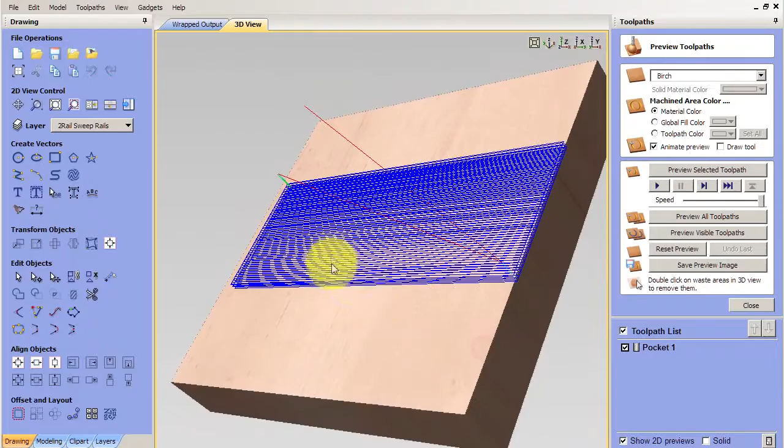For example, if we set up a little box here, and let's say we're going to make a normal pocket in this area. Let's say the pocket is 4 millimeters. Now we have an end mill, 4 millimeters. Let's put that in like that. Press calculate, and if you can see your job, it's a normal job.

Okay, let's preview the toolpath. You're not going to have a normal job, but because this is a wrapping job, you can preview how the toolpath wraps around the cylinder.

To see that, let's put this together so we can see it. You're going to have to go to toolpath drawing, and then you have two options: wrap the values around the Y and around the X.

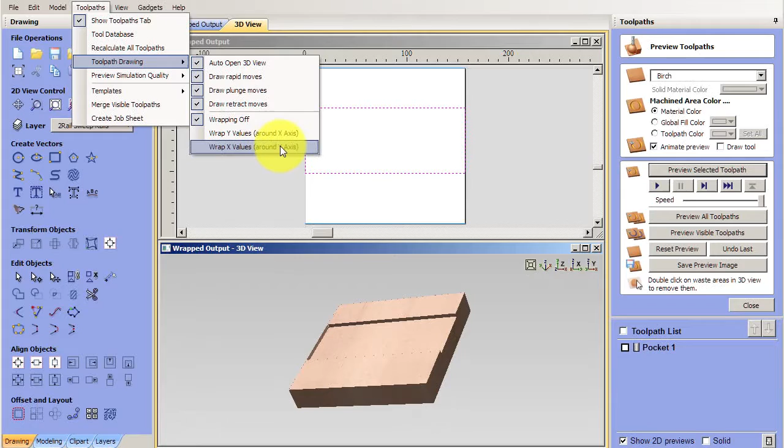In this case we use the Y-axis to be the rotary axis for our tool, so it's going to be wrapped around X. We select that, and you can see the toolpath.

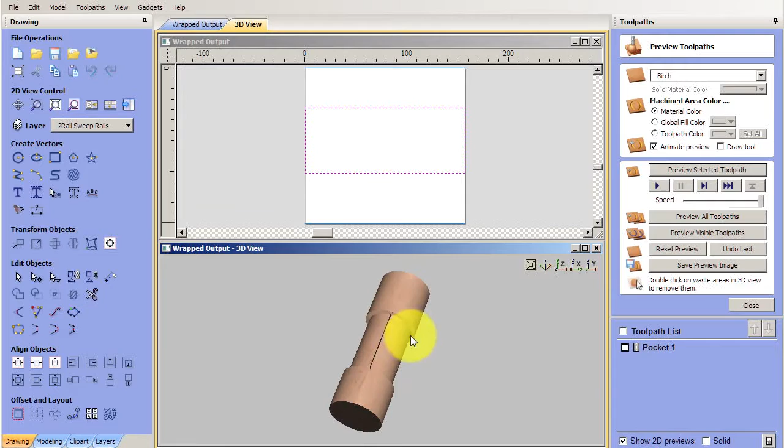If you can see, there is a little line here because the toolpath is not all the way. Okay, to keep working we have to wrap off the toolpath.

Let's open this. You can also have it a little more outside the boundaries, so when you calculate this toolpath again, it's outside the boundaries. So if I preview this work, this line is going to disappear.

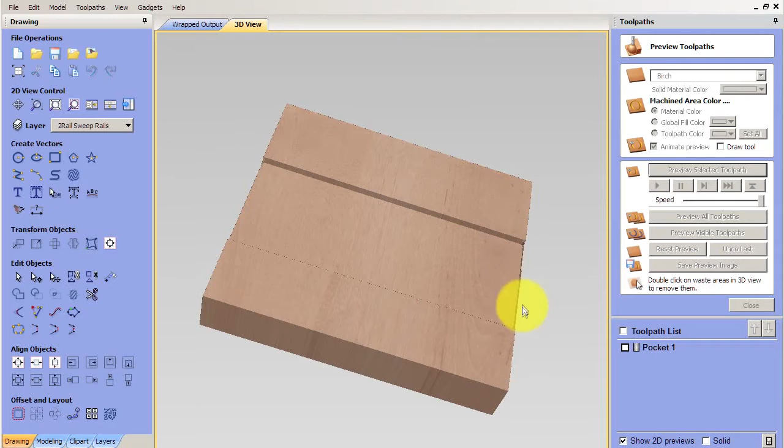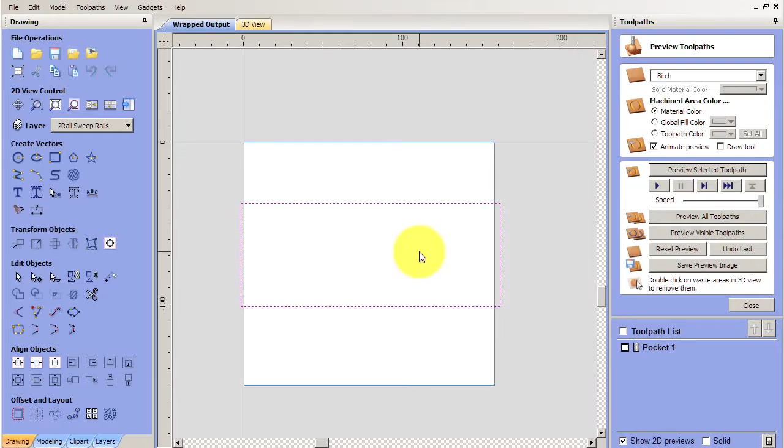And of course, if we put the toolpath drawing again, we're going to see it like this, without that line. Basically you have the ability to make any kind of toolpath here, and it's wrapped around that circle.

Let's say if we are going to have a text here. Let's say we're going to have this text here. It's a little small.

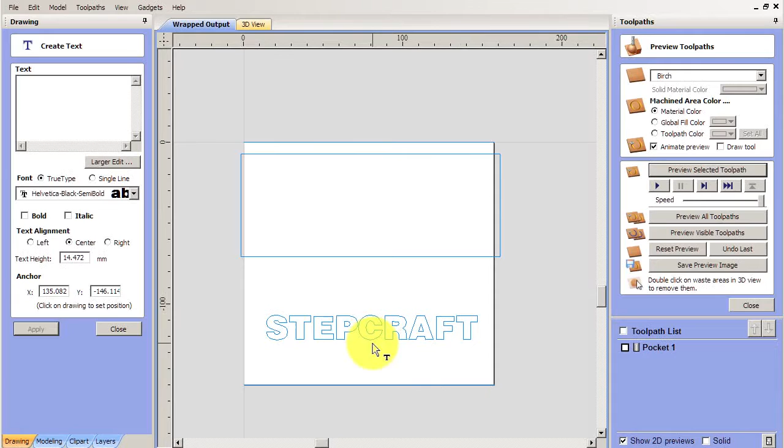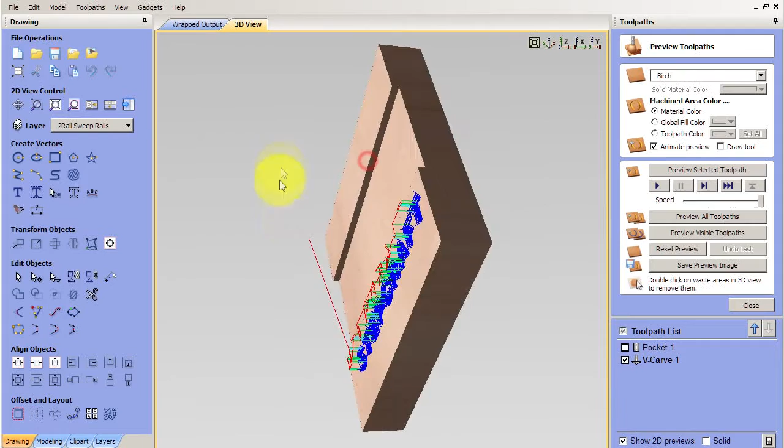Now we can do a pocket here with this, or maybe a V-carve. Let's say the engraving is 3 millimeters. We have a 45-degree V-bit. Calculate, and you're going to see your engraving right there.

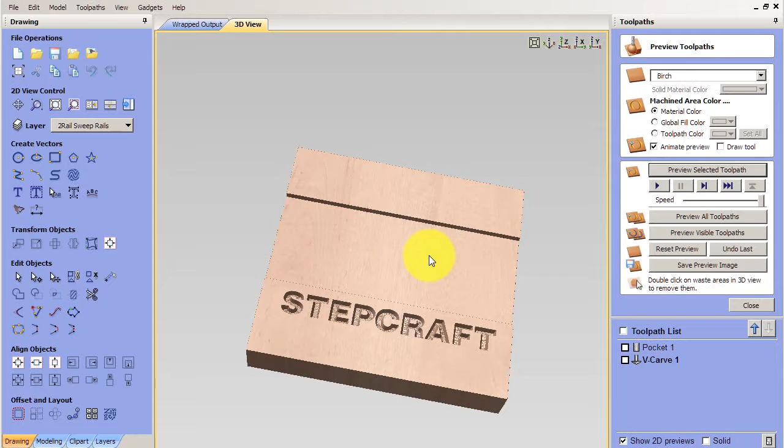And of course, if you go to the toolpath drawing and wrap it again, there you have it.

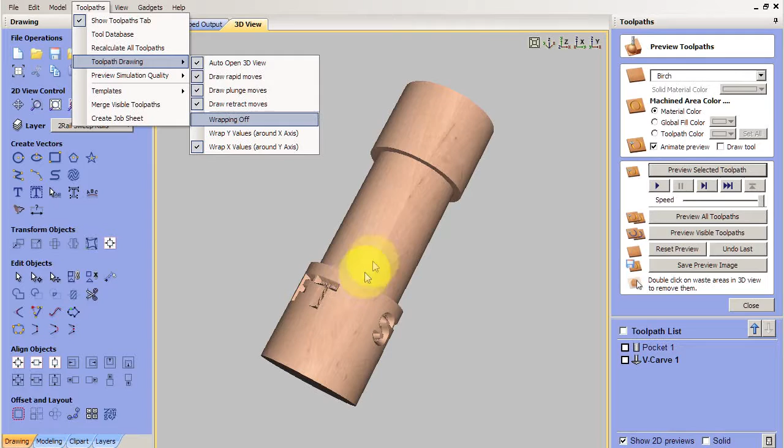Now, one thing I notice when I do this, I don't know why, but if you are putting, for example, this text, the preview looks okay. But I don't know why, when I export the toolpath, this text comes out as if it's flipped. So you have to flip this text around the y-axis so you can have it right. Maybe it's a bug, maybe something is happening with the processing for this text.

Now, another important thing here is how did you export the toolpath? To export these toolpaths, you're going to have to use a different setup. Normally you have, for example, this Mach2/3 ATC or the Mach2/3 Arcs, millimeter exports, but you have these two.

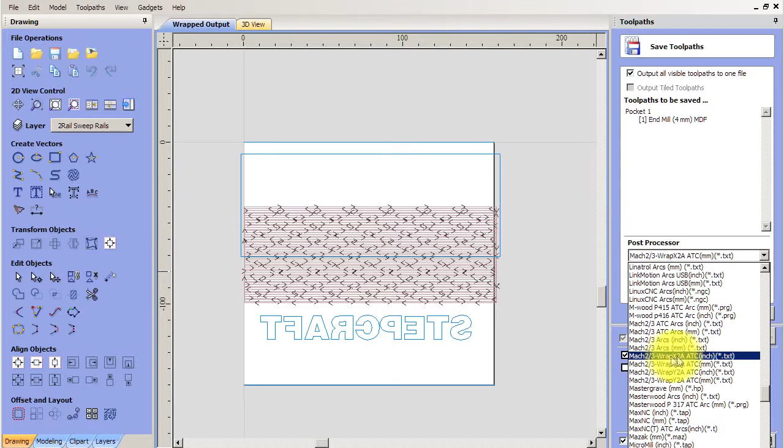Wrap X, wrap Y, with millimeters and inches. This is the one you're going to use for wrapping; in this case we're going to wrap the x-axis around the a-axis. So for this job we're going to use this one: we're going to wrap x to a in millimeters.

And this is the one you're going to use to save these toolpaths. Basically this is a simple setup to use the rotary tool.

Maybe I'm going to make some other tutorials so you can see how to work with rails to make different wrappings around these jobs, but it's not that difficult.